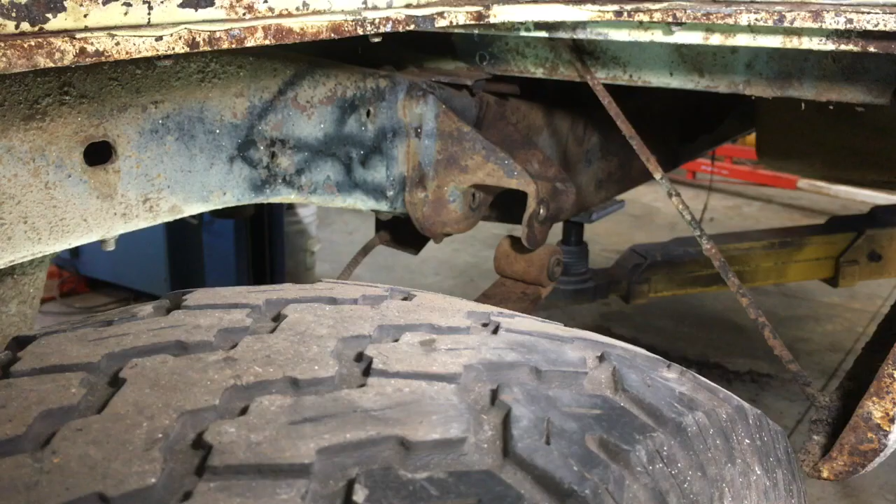So yet another difference from C10s to K10s is the forward leaf spring hanger is much bigger on a K10. See how much further it hangs down? So you have to swap out this little guy right here with this forward one, and it'll effectively lift the back of the truck. I'm thinking something like 2.5 inches, because that's how much taller approximately the K10s are compared to C10s.

So anyway, the other difference is on 67s and 8s, I believe these springs are narrower. So I might need to put some bushings in there, some washers, because this is also bent. Interesting. I might need to put a couple washers in there, which is also fine because I'm probably going to change these springs over to 71 or 69, an earlier or later style of springs. The back hangers are the same, so it makes sense for me to do this now and then come back later and change those springs.

So now I'm getting ready to drill out these rivets and pop this thing off. The other unfortunate thing is C10 frames have this bump right here on each side of the spring hanger. I think it's basically a flute to add rigidity to the frame right there. Since this is a little bit taller and a little bit wider, I'm afraid that it might line up in those. So I don't know what I'm going to do with that. I might have to, I hate to say it, make them disappear, or I don't know. I'm gonna get this off and we'll cross that bridge when we come to it. I'm really not looking forward to the answer on that because I have a really bad feeling it's gonna be in the way.

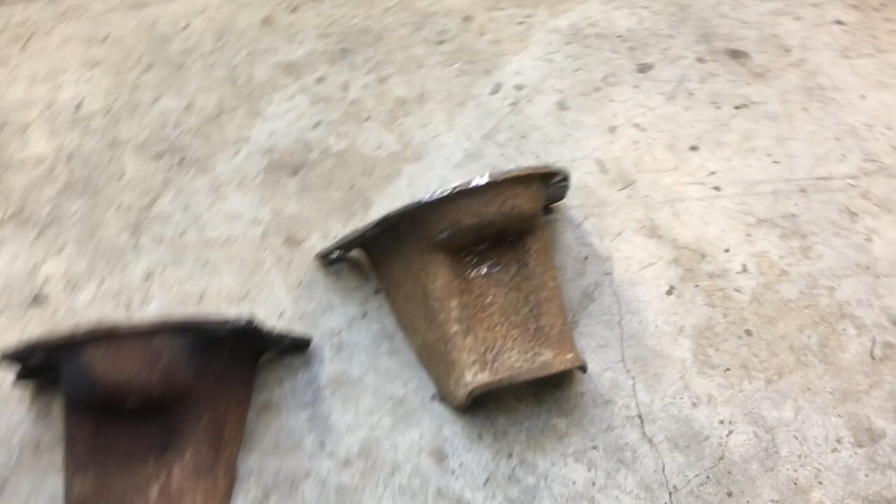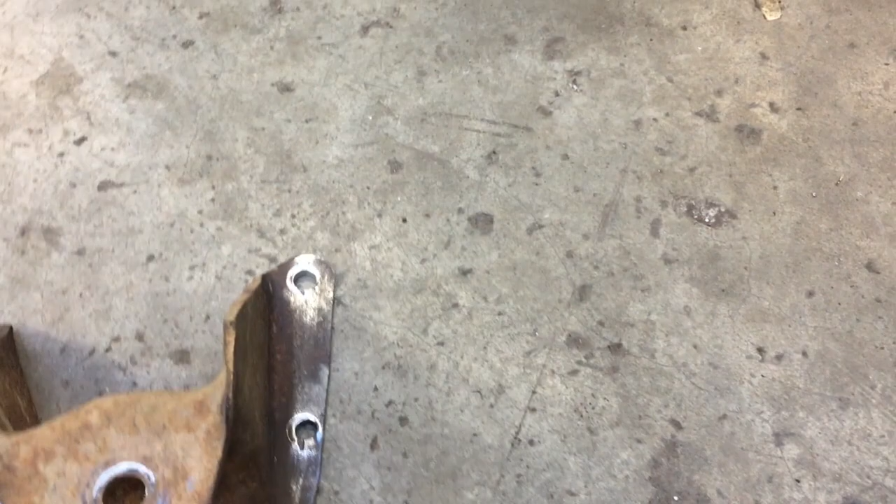All right, serious leaf spring hanger problems. So unfortunately, I just figured something out after I cut the leaf spring hangers off. This is your normal 4-wheel drive spring eye hanger, and it is just straight, it doesn't have any cant to it at all. And then if you put the other 2-wheel drive spring hanger next to it, the whole thing is tweaked. I know why now, of course I figured it out.

This is to make up for the fact that on 2-wheel drive frames, they start to dip out right here, they come out at an angle, and then they have this bow in the frame, which is where the coil springs would go. So I'm in quite a predicament right now. I've already drilled the holes, already had everything bolted in, everything was pretty kosher. So yeah, I'm screwed. I need to figure this out.

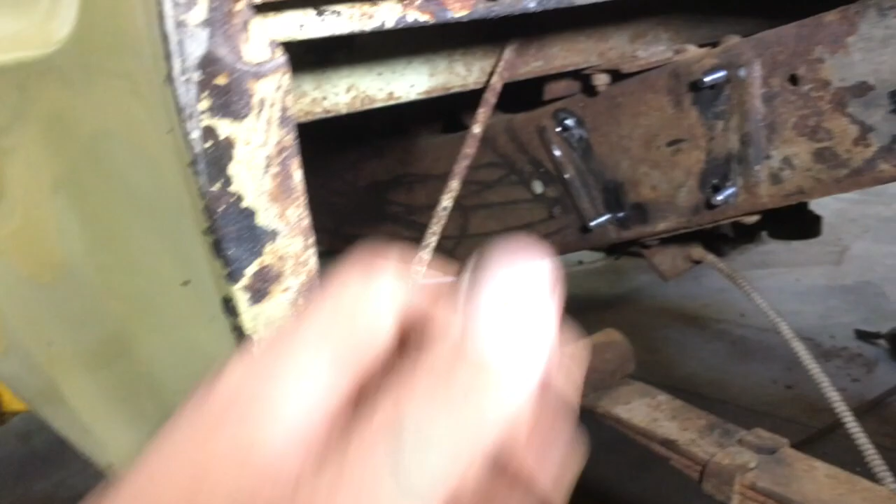I don't know at what point the frame starts to actually bend, but I might be able to go from a 52-inch spring down to the other common length, I think 56. That might get me past the bend, but then I'll have this weird recess that everybody will see. It's kind of dumb, I don't really want that, and I really don't want to change these springs because I'm lazy.

I do have a set of the longer springs, but they're lift springs, and I'm trying to just do this on the real cheap. So my other thought is to just shim the front of that out with a plate, just like a quarter inch plate, and see if that does it. The problem is it's about a half inch canted, so when I measured this all out, I don't think a quarter inch is enough. I have one sitting right here that's a quarter inch off. It might work. I think I might put it together and see what that looks like.

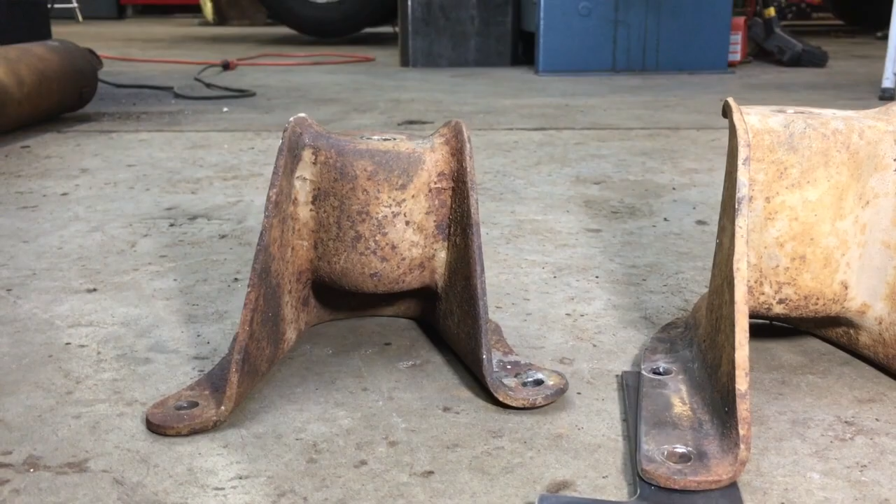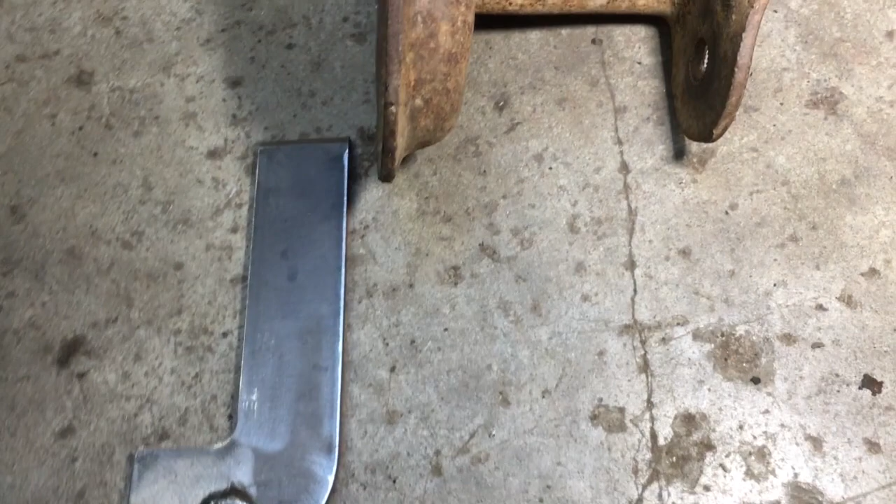So what I'll probably do is just make a spacer right here and see if everything lines up. Also, the difference is the width of the spring hanger. The old ones are about 3/4 of an inch narrower, which is not a big deal.

I'm just going to cut some washers on the CNC so I can space the springs in here. The reason this is a good thing is it will give me a little bit of wiggle room one way or the other, so I can make sure my axle is in straight and all that. Once again, I'm trying to make this thing look like an original truck.

So for any of you watching who are like, why is he going to detail when he could just fab up some new billet spring hangers or whatever - that's why.

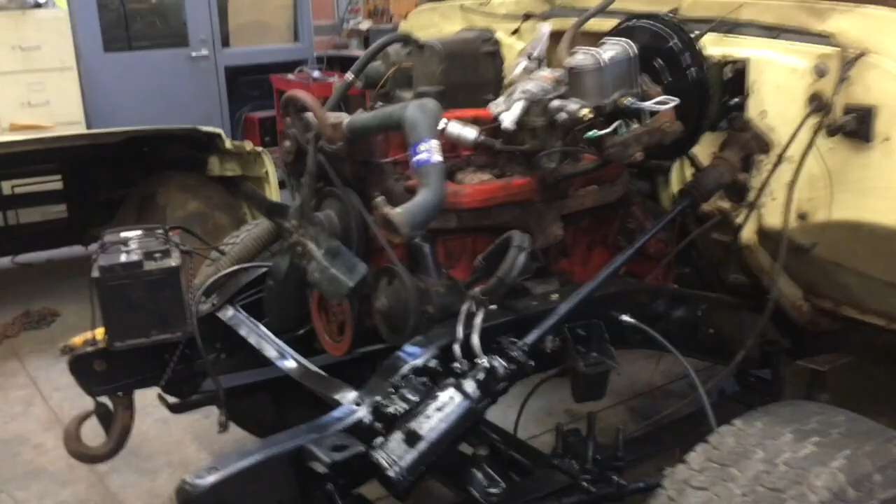Anyway, that's today's update. I've been having a bit of a hard time. I also went ahead and decided to get a new master cylinder and put the proper proportioning valve on, and Inline Tube is sending me another kit to fix what I botched before. So that's kind of the theme of this build: go too fast, screw up, and then backpedal until you get it right.

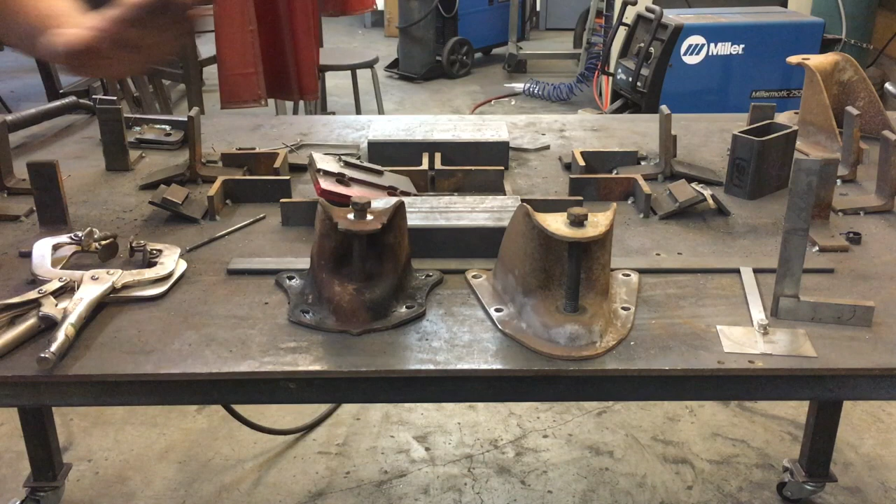I'm about to either ruin all this stuff or make it nice. So there's the difference, if you can see it. This is canted 10 degrees, and then it's also going that way a little bit.

Oh man, people are gonna say I'm gonna die. I'm gonna cut this right here, then bend it to match that angle, and hopefully do a really nice job re-welding it. That's the best plan I have right now. My fallback plan is to just put these back on it and get some lift springs. So we'll see what happens.

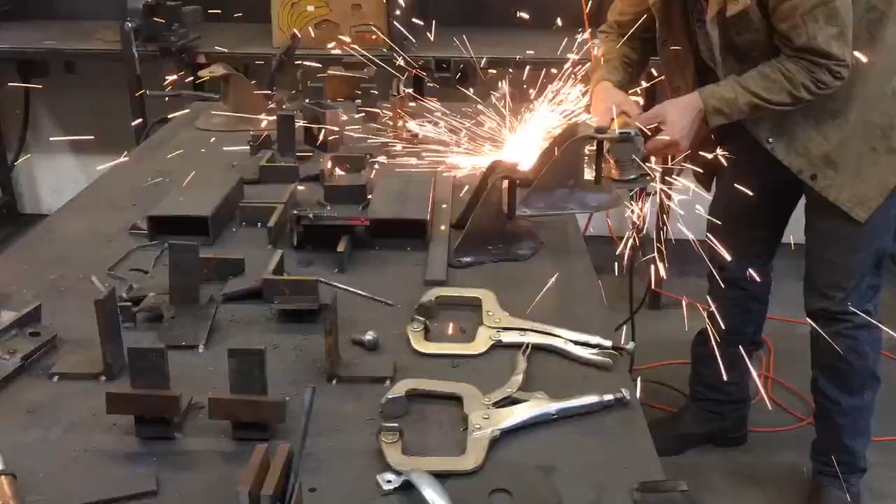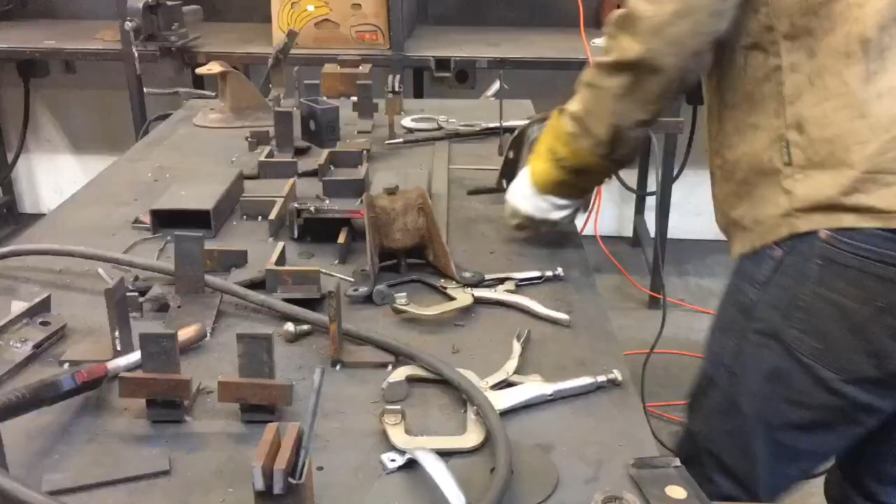Okay, so I went ahead and sliced this and spread it, and now I'm gonna try to fit it on the truck to see if I got the right angle. I matched it to the other one, so I'm relatively sure I got it, but I'll have to do a perfect weld on this.

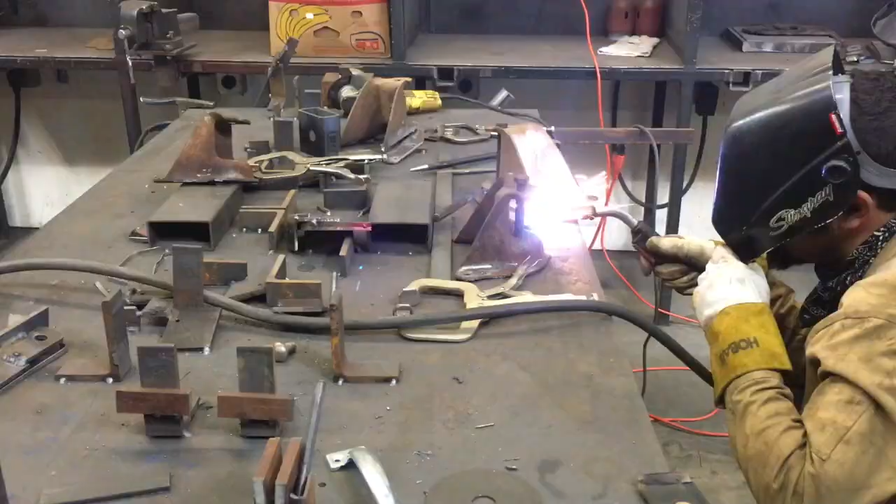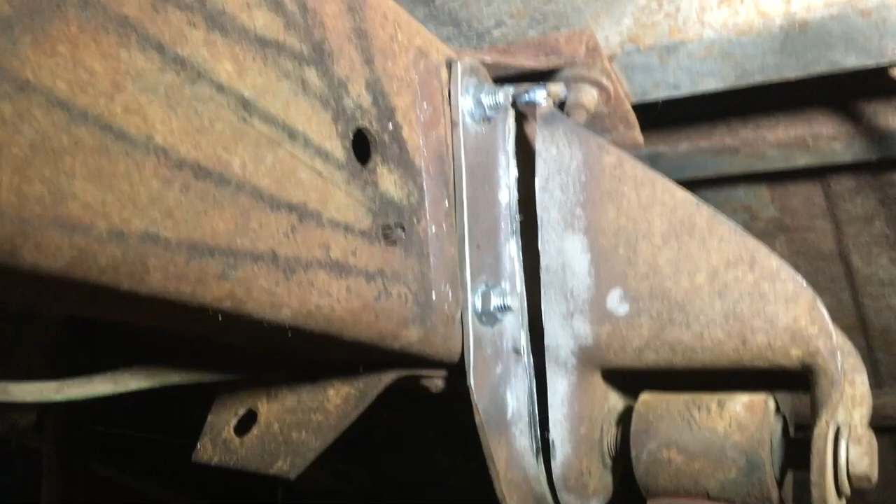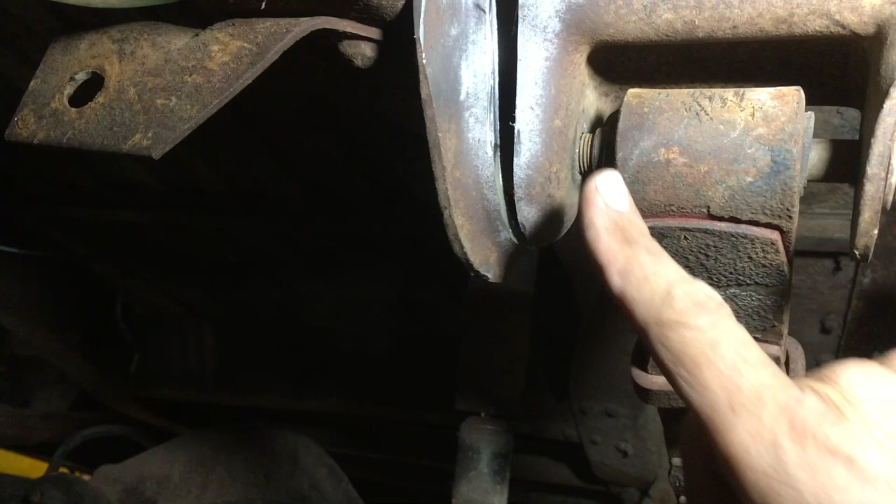All right, so I made my modification - you can see I just split the side of this bracket and pried it out. It ended up being just right, I think. The bolt went right through. I have the same spacing on each side, so this is going to take a 1/4 inch washer, and this is going to take two 1/4 inch washers on this side. It's the same on the other side, so I think I got this just right. I kind of got lucky.

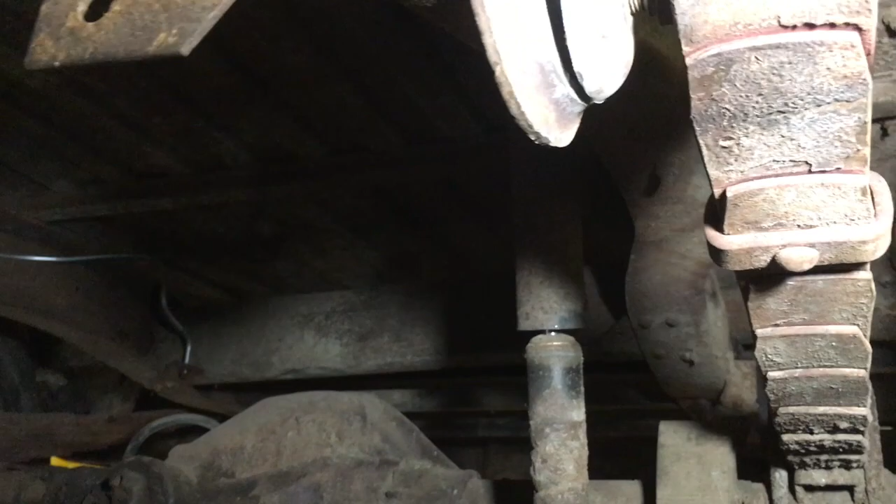So it's all bolted in right now. I'm gonna plasma cut up the washers on the CNC, dry fit it one more time, and then pull everything out, full weld it, grind it, and put it back.

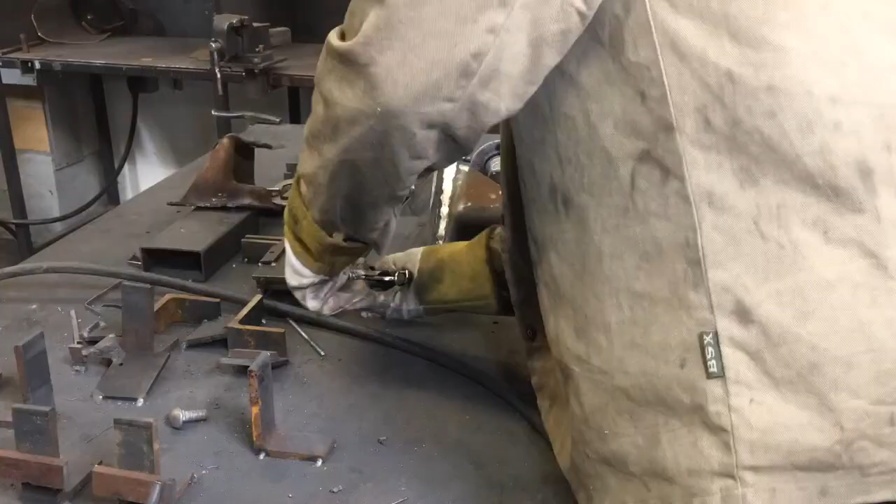So I have the rear leaf spring hangers on permanently, and this is what it looks like for ride height. I'm not sure, I think this is okay. It still looks like it's a little higher in the front, but I still gotta put the front clip and the rest of the truck together. It might help a little.

I just got up here and jumped on this thing, and I was able to jump hard enough to make it bottom out. So there's no shocks on it.

It's definitely still leaning back a little bit, but there's no front clip. Definitely taller though, about 2 inches taller.

Something's up right here.

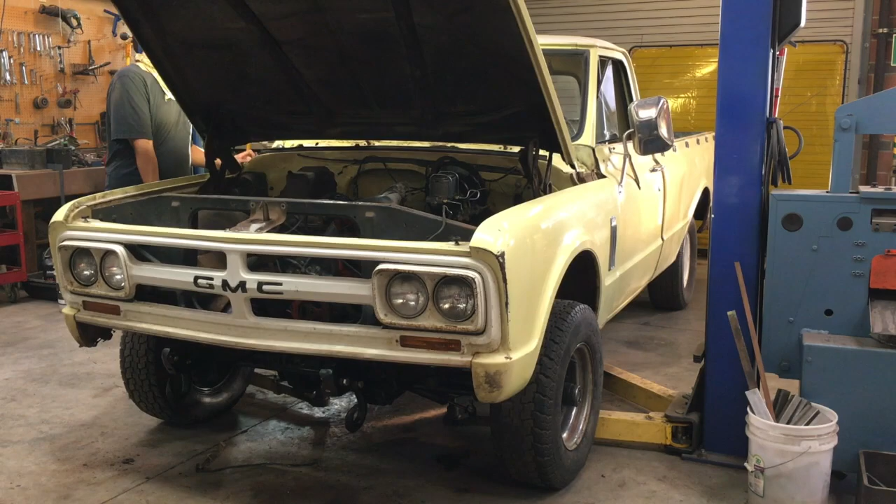It'll be about like, just hold it, just for, right? That's good.

And then West Coast mirrors. On the side ones? I need some West Coast, dude.

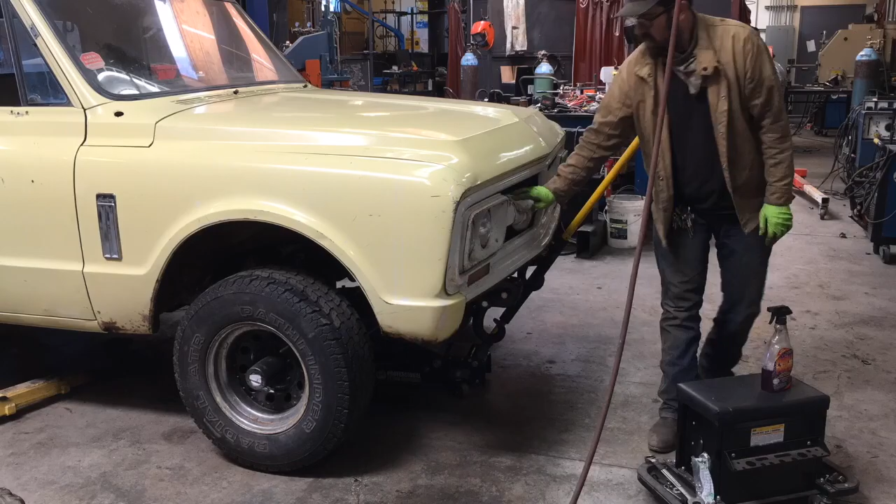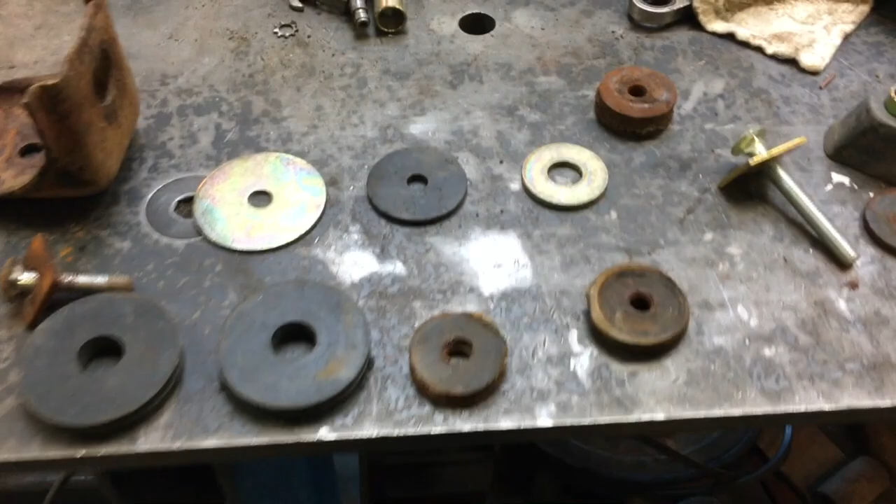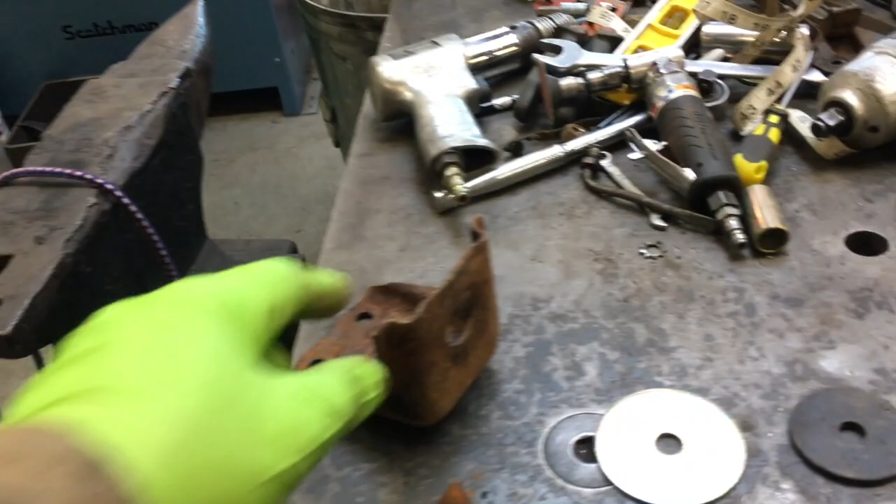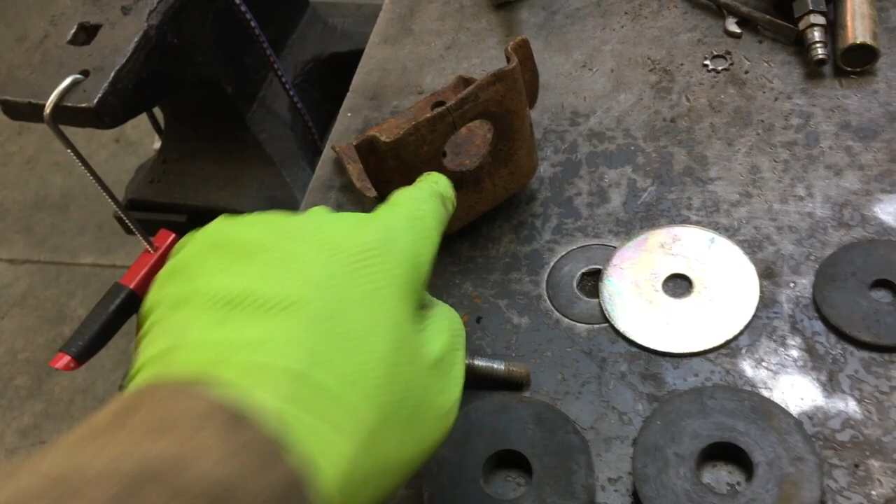So I wanted to go over another difference that 67-68s have, which is the forward body mount or core support mount has a different size hole. They use the smaller style bushings. I'm wanting to use the ones that I have because I have them. In order to do that, I had to grind off this little collar since that was too small for that hole.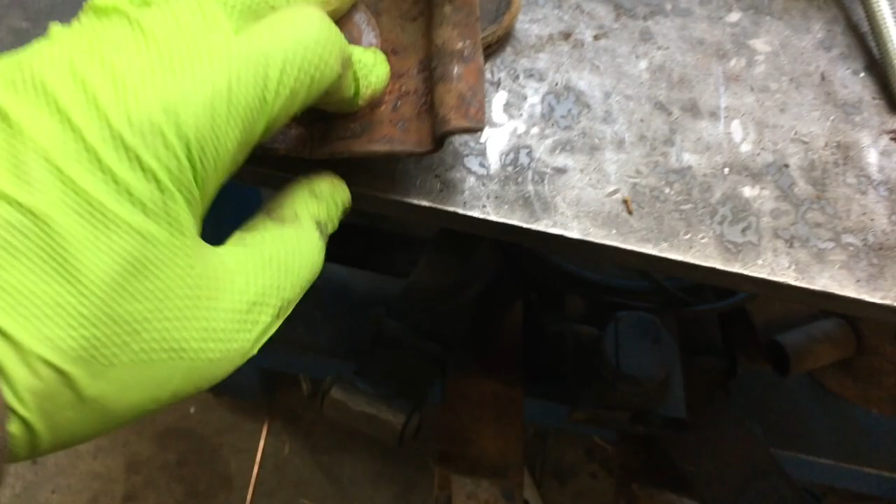Other than that, it should just fit right on there, no problem. And I can use this newer style, far superior bushing. I already checked that it gives me the right body lines and all that. So that's just another funny little difference, this is the whole setup right here. This is what it looks like on the truck. This goes in between the mount here like that, and then this guy goes on the other side, so this is how sandwiched it is. And of course these are all rotten and no good, and there's no give in these at all. So with this, these are polyurethane, should be a little bit better.

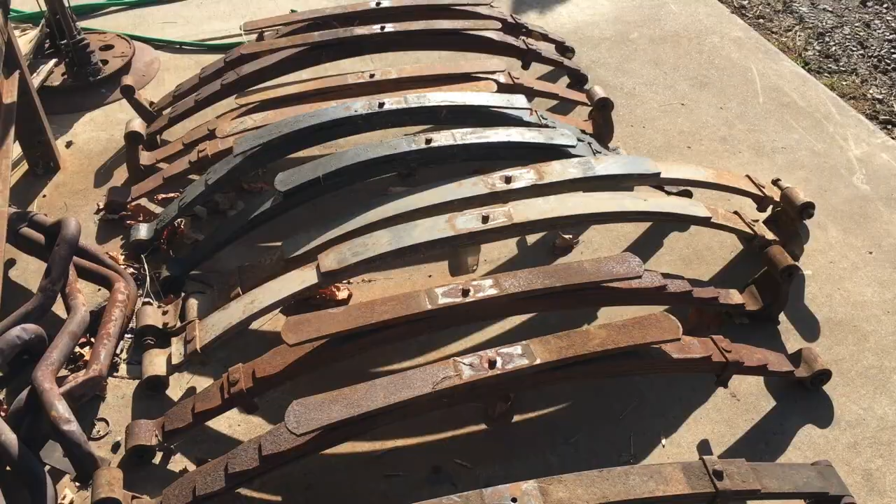Anyway, we'll see. So every one of these springs is out of a 67 through 72 Chevy pickup, and every one of them is different. So something that might be a confusion is people think, oh, I have the 67 pickup, it's going to take the same springs as a 72 or 70 or whatever, and I can tell you there's a lot of differences.

So right here, this is a front springs. These are aftermarket, probably something like a 2 or 3 inch lift spring. And they're actually quality. I'll keep these around and use them for a build someday.

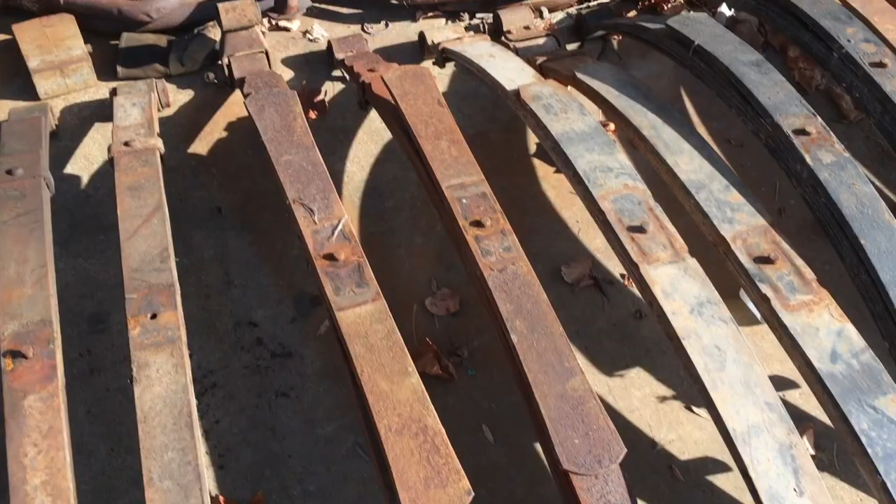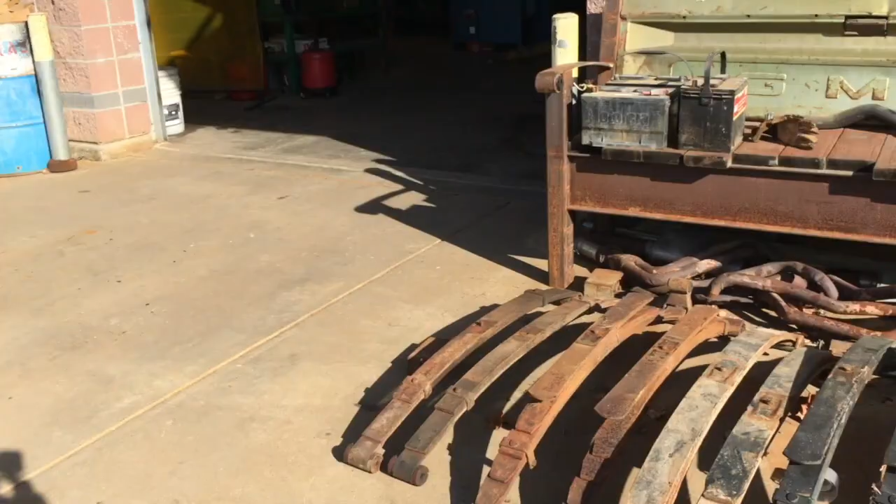This next spring over here, these are rear springs, and these are out of like a 72. This next set here, these are aftermarket springs as well, but they were out of the 68 frame that I have over there. There was an original 4-wheel drive frame that I used the parts off of to convert this truck to 4-wheel drive. The funny thing about these is, so far all the springs I've run into in the back of 67 through 72 Chevy pickup trucks are 52 inch springs, and these are the 56 inch springs that are less common, I guess.

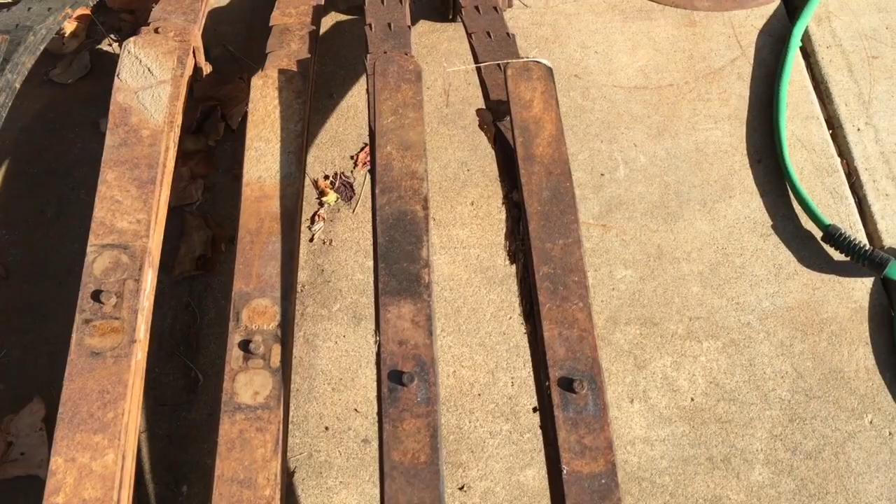These are just some aftermarket junk, but anyway, I think that's what they came with, was 56s on those, and I'll show you. Then we have another set of 69, 72 style rear leaf springs, and then we have a set of 67 two-wheel drive rear leaf springs. The reason I know they're 67s is because they're slightly narrower. So it's a little bit of spring information. Oh, and then these right here are out of a 71, and they've been re-arched. So those are about a 4-inch lift spring as well. Anyway, there's just a few differences between lift springs or leaf springs that you think are all the same.

Okay, so I'm going to make a final installment video on this little 67 that I converted to 4-wheel drive. And I've been driving it periodically now for about a week.

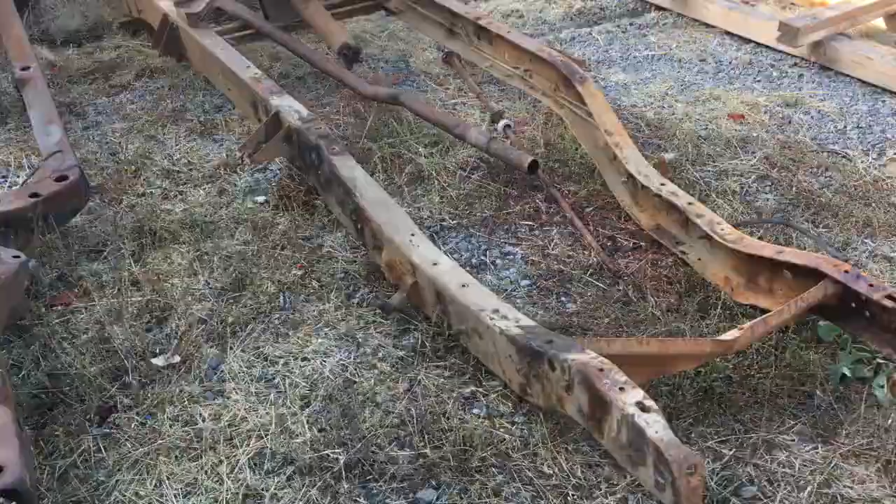So other than this being upside down, this is a factory 68 Chevy K10 pickup frame. And we can go over some of the differences. Now, I've cut off all of the bracketry, which I bolted on that truck. Meaning the spring hangers and everything I needed to convert that to 4-wheel drive.

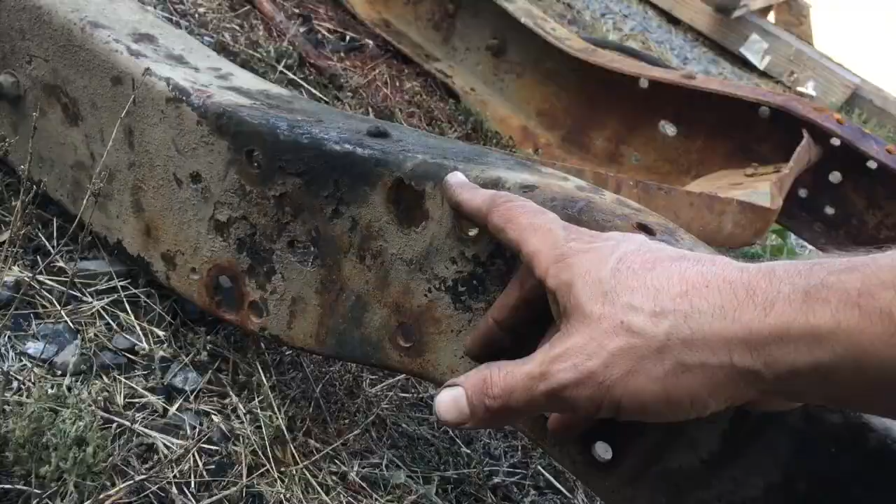The forward leaf spring hangers are way different. So the first thing I want to talk about on this truck is it being a 68. This is, like, once again, it's upside down, but this is the driver's side. It's completely flat right here in the front frame horn. Normally what you'd see around here is a dimple out and then another dimple in, so that you can put a power steering pump on it, or a power steering box, that is. And this doesn't have that. So 67s and 68s, this is a difference on their frames. They are completely flat here.

Now, here's the weird part. This is my original 67 GMC, originally a V6, C10 two-wheel drive. It is not supposed to have a dimpled frame, but it had one.

And it also had power steering, but it had that hydro-assist stuff, so that was weird. It just sort of bolted right on. If you watch the video, you know it had the dimples out but not the dimples in, so I just heated the frame up and tightened the bolts down, and it kind of aligned itself.

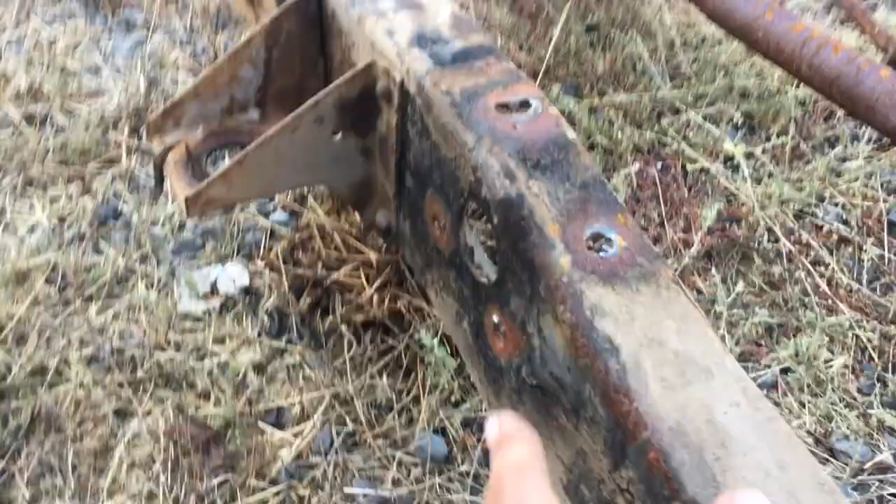So there's the first thing, starting from the frame going back. That's a difference between two-wheel drives and four-wheel drives. The other difference is right here on four-wheel drives versus two-wheel drives.

If you've watched the video, you know there is this big dimple. You see this? This is another frame I have that I had to fill all in and straighten.

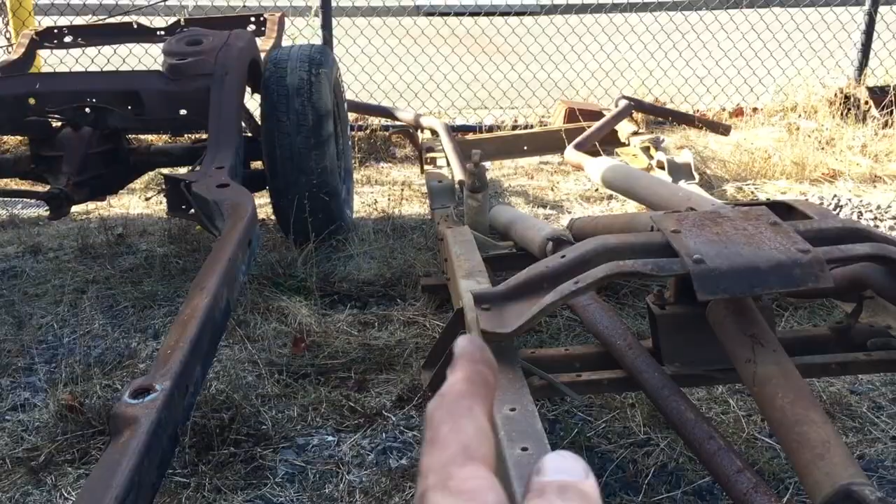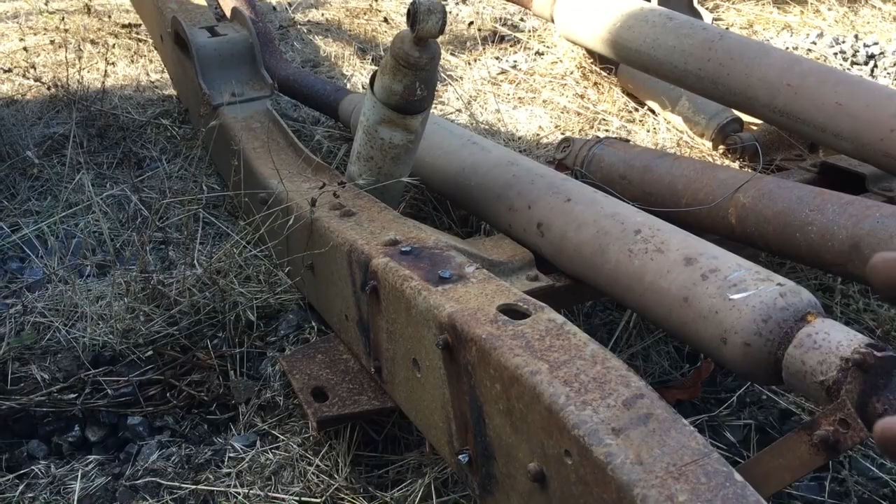Okay, so here's the big difference. From there back on a normal four-wheel drive, the frame is completely straight. On a two-wheel drive, it actually kicks out right here, starting around the forward bed mount, and kicks out like that. What that does is allow it to be wide enough in the back for the coil spring pockets to line up and get welded in or riveted into place.

Another thing I find fascinating about this truck, and I don't know if all '67s and '68s are like this, but this one had 56-inch springs on it. And I cut these spring hangers off—they had not been moved.

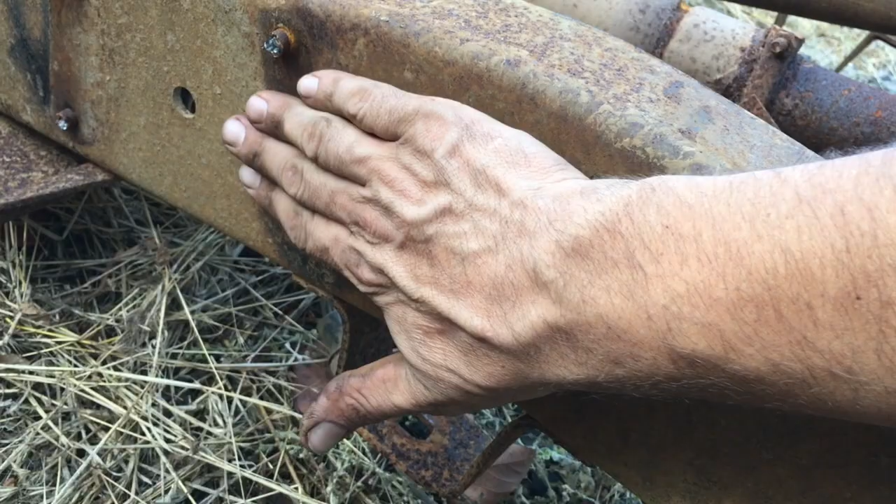The other thing with four-wheel drives is there's no dimple. Next to the spring hangers on two-wheel drives, there's usually this little outward dimple that I think is there to add rigidness to the frame. So if you're going to look at a two-wheel drive or a four-wheel drive and tell if it's an original four-wheel drive, you might look right there because you can't really hide that. I guess you could grind them out.

I thought about doing it, but I just decided to leave them because I'm not going to lie about this truck. I'm just going to tell everybody, hey, it used to be a two-wheel drive and I converted it to four-wheel drive. No harm in that.

Two-wheel drives have this big cross member in the middle that we went over in other videos, and four-wheel drives don't.

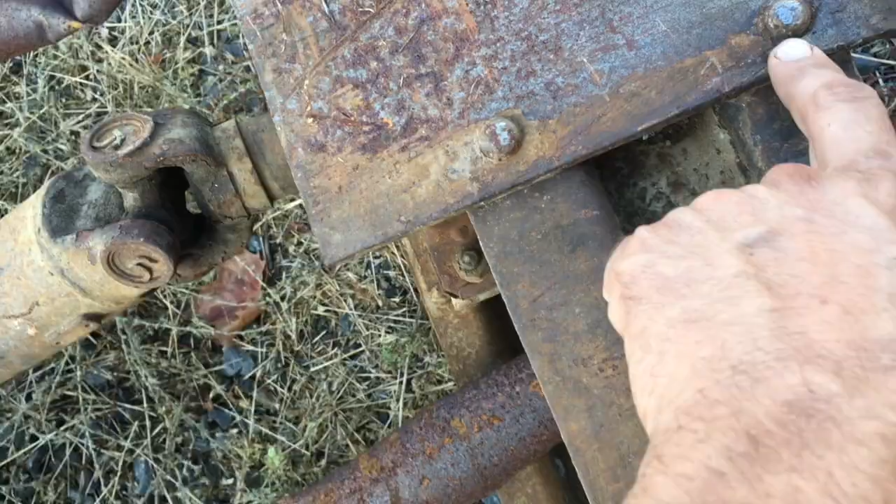This looks like... I don't know, that actually looks like a factory rivet. I was going to say that looks like an aftermarket kind of setup there, but I guess it's not.

I didn't know they made four-wheel drives with two-piece driveshafts, so anyway, this one had one. I'll probably keep all that stuff in case I ever want to use it. This frame is not garbage—I'm going to keep it. I'm probably going to cut it down to just frame sides so I can store it easier.

So I still need to paint match this tailgate, but like I said earlier, I've been driving this truck for about a week and it's been a good little truck. Been running great. So this is its final look—just a little stock-looking K10 is all I wanted.

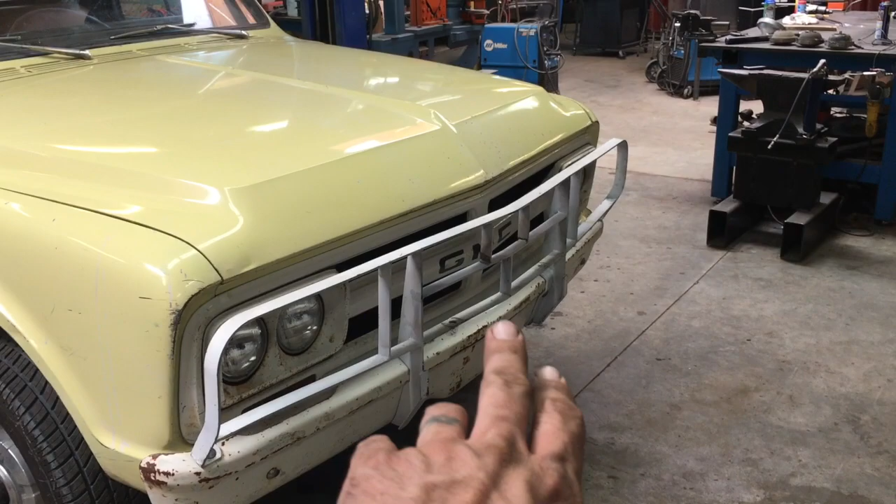I just like the fact that it's the one-year-only GMC grille, and you don't really see those in white that often. One-year-only badges, just a strange little truck with a small back window. Originally a V6, strange color combination with the yellow on white.

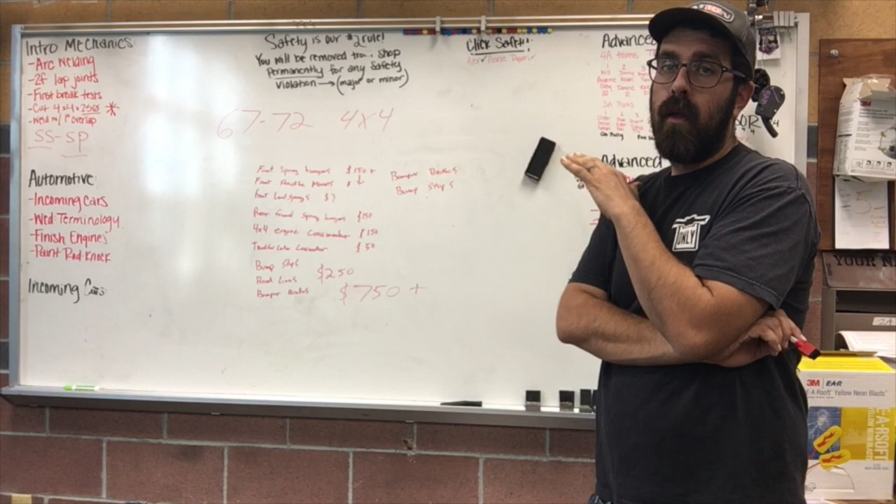So I wanted to do a wrap-up video on the cost of converting a two-wheel drive C10 into a four-wheel drive, and go over a couple of the key details I maybe missed throughout the video. The number one takeaway from this is, unless the truck has sentimental value to you, or you have no access to a four-wheel drive frame, I wouldn't do this.

From a monetary standpoint, I think it's beneficial for you to buy a frame or buy a whole other truck and donate your body to that truck to make it a four-wheel drive. If you have nothing going on and you're bored, or you're a teacher during COVID and you need something to keep you busy for a long time, maybe. But just the price of everything, if you were going to convert it, it doesn't make sense.

It really doesn't. So right here we have front spring hangers, 150 bucks. Sometimes a guy will throw in the front shackle mounts with that.

Front leaf springs, I didn't even write that down in my total, but those could be a couple hundred dollars, or if you find a used set, 100 bucks.

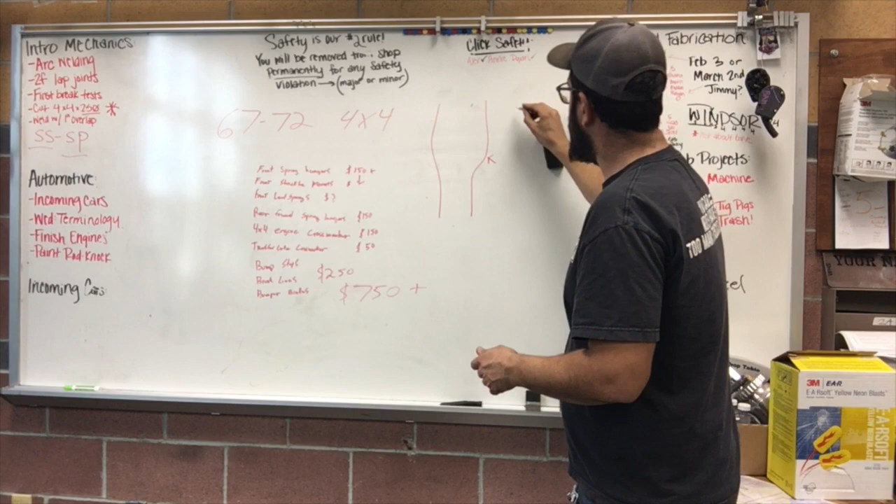You have rear forward spring hangers. This is the thing I had to slice and twist because the frame on a two-wheel drive looks different versus a four-wheel drive, and the spring hanger goes right here. On a four-wheel drive frame, it's just straight. So when you get these rear forward spring hangers from a four-wheel drive truck, they're going to be in the wrong position for your leaf spring, because your rear mount ends up back here.

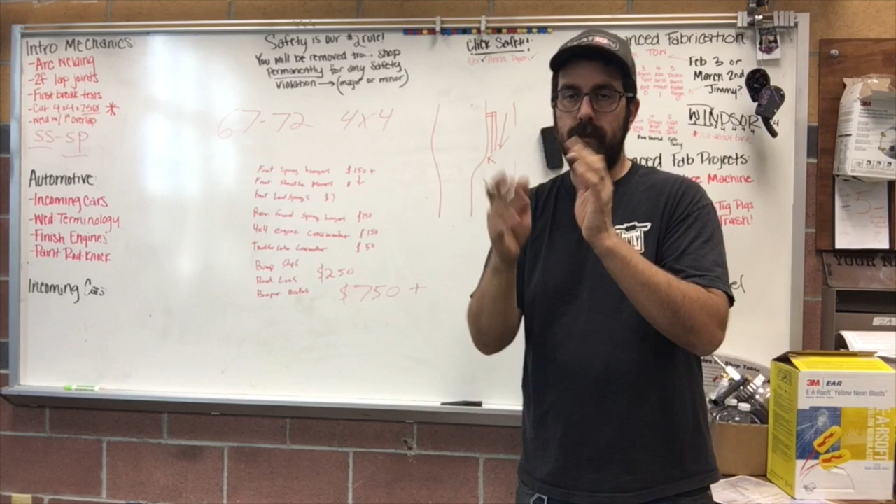What I ended up with was a leaf spring that was angled, and it didn't work. So I had to modify the crap out of those things, as you saw in the video. So you don't have to do that - you could just get lift springs for a C20 in the back, or put a block if you don't really care. Now, I would never change a rear spring hanger again.

A lot of why this was time consuming for me is because I'm trying to make it look original. I was trying to make it so that if you pop your head underneath my truck, you'd think this is an original K10. I think I'm gonna fool 9 out of 10 people. I'm not really trying to, but that's what I was going for, I guess.

So anyway, front leaf springs, the rear spring hangers, I've seen those go for $150. I was gonna buy a set of front spring hangers and shackle mounts before I got my twisted donor frame that I ended up not using. Those are in the $150 to $200 range, and I'm kind of keeping things on the low side on this.

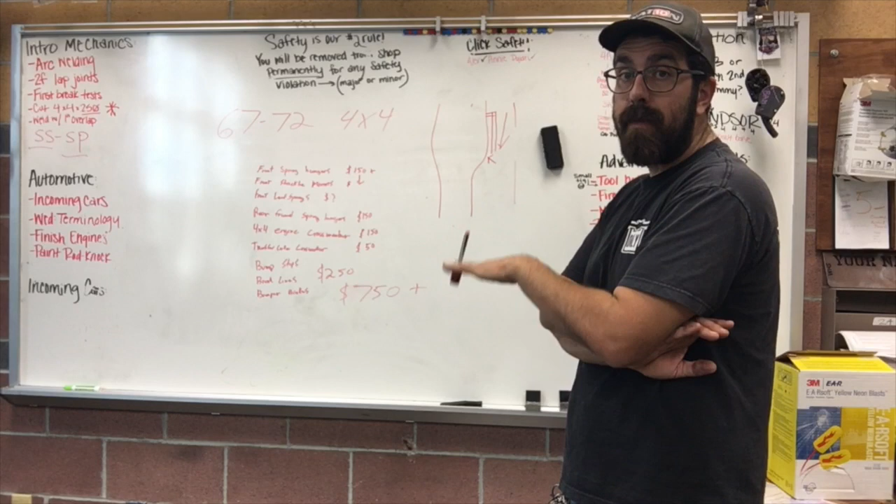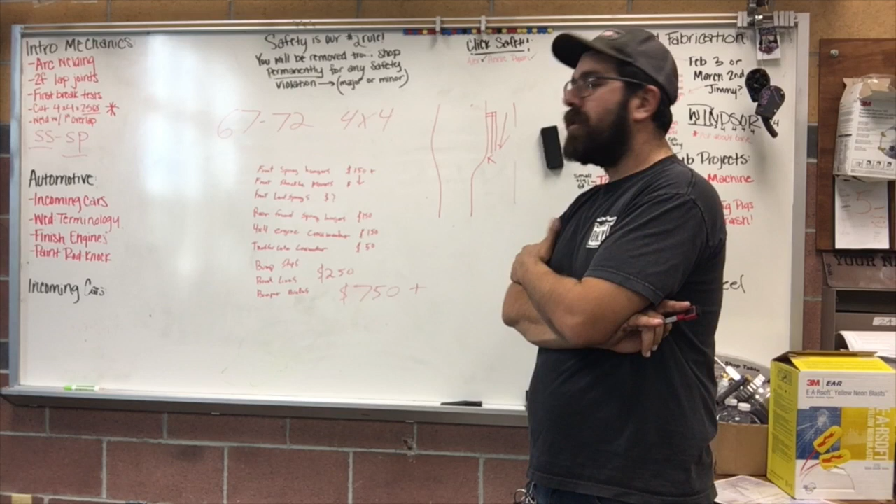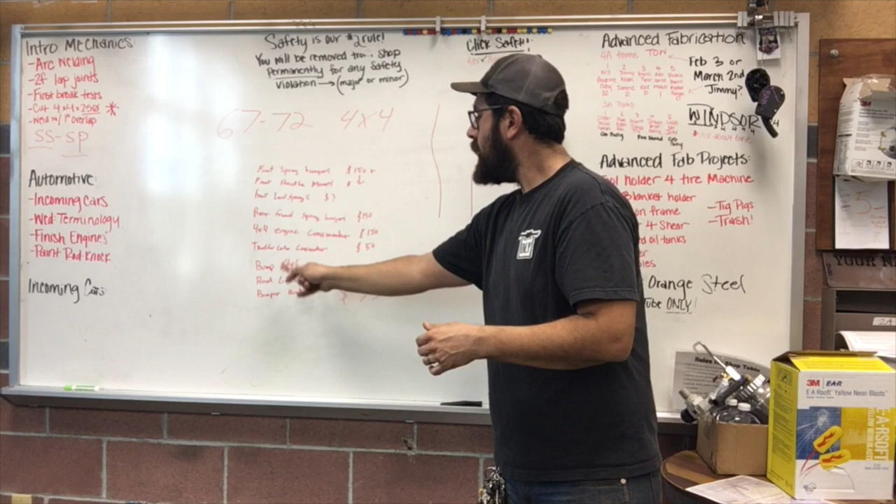A four-wheel drive engine cross member for a 67-72, I paid $150 for mine, that's actually what it costs. I had almost all this stuff. The only thing I had to buy was a transfer case cross member for $50. I've seen them sell for 80 or 100 on the forum. Bump stops, brake lines, bumper brackets - it all adds up to $750.

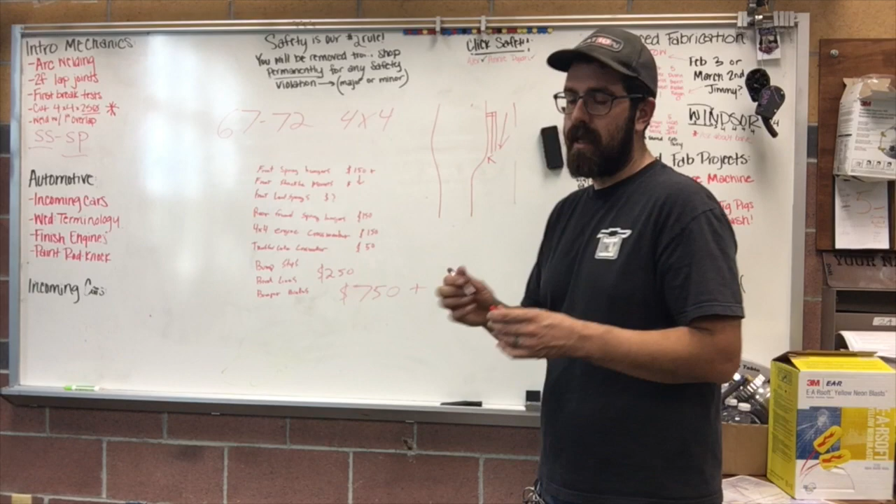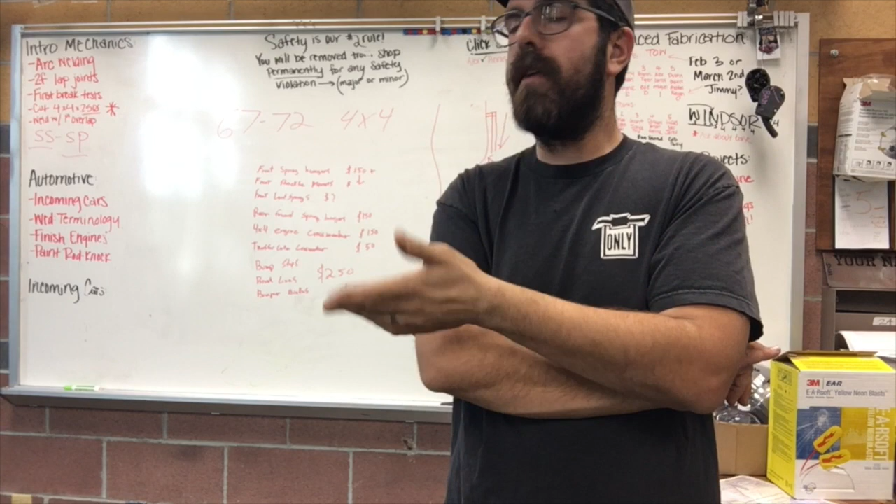And there's a lot of stuff I left out here, so you're gonna be at least $1,000, maybe $1,500 in, unless you have a lot of parts. Now, that was my thing - I had all these parts laying around, so I just did it. And the truck was all together, it was running, it was driving, it was kind of a nice little original truck. So that's why I did it.

But I will say, for most people, it is definitely not going to be worth it. It's easier to find a frame. There's just too many differences.

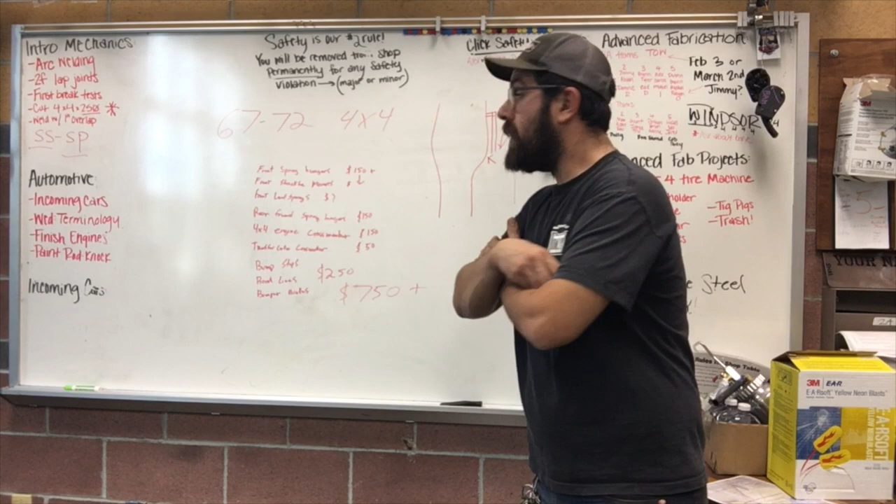Now, you watched the video, you saw the amount of fabrication I had to do for the shackle mounts, that spot there, to flatten that spot out. I had to heat and bend that. I had to trim those rear spring mounts. There's just a lot. I ended up making my own front spring mounts because it was 67, 68 style. So just a lot of work.

The truck's great. I've been driving it for a whole week right now, every day - taking my kids locally to their daycare and stuff in it. And it's been fine at freeway speeds of 70 miles an hour. Doesn't even feel like it needs alignment, so I'm very confident that all my stuff is straight and there's no problems. It doesn't pull one way or the other - it's very straight, better than most old trucks. So I'm glad that it worked out, but I just wouldn't recommend it.

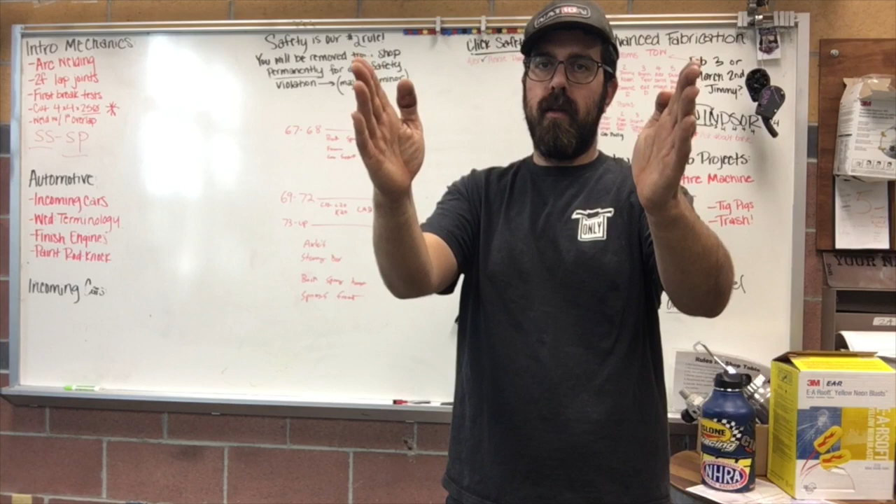So here's a couple things that vary from year to year and from C10 to K10. The number one thing is the frame. Four-wheel drive frames are straight, and two-wheel drive frames have a bit of a bow to them in the back, so they look like this.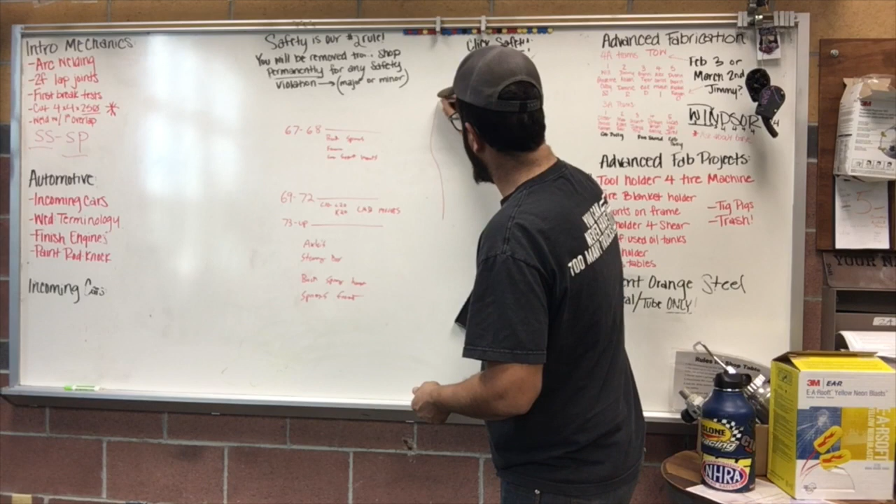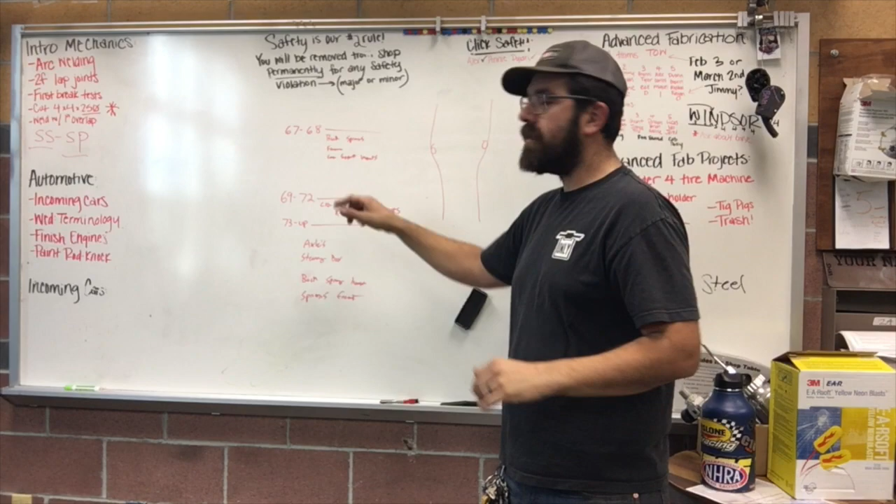This is so that the spring pockets on a coil spring truck line up with the frame. So the frame is different. One thing I didn't expect is C10s have different cab mounts than K20s and C20s. C10s have their own basic cab mount, and then 67, 68s are even different yet in the forward radiator support mount up there. That's a whole different thing.

You can kind of convert mounts and stuff, which I think I put in the video, but it's just one of those things you'll run into and you'll be like, wow, this is dumb. So it would be easier to convert a C20 to a K20 or K10 even, because you won't have to change the height of the cab mount brackets, if that makes sense.

So what is the same on trucks? Well, not a lot. 67s have their own, more narrow rear leaf spring, which will help you if you're gonna change it, because you have a little bit more room to play with to get everything straight. The 67, 68 frames are different. They don't have the dimple out for the power steering bracket. The core support mounts for 67, 68s are smaller. I think I already went over that.

What can you use from a 73 and up? You can use any Dana 44. Every Dana 44 Chevy-wise is going to be the same spring spacing. The steering box, any Chevy four-wheel drive steering box, I think basically like 90s and in 89 or 91, or whenever they stopped making the square body, I think those are all the same.

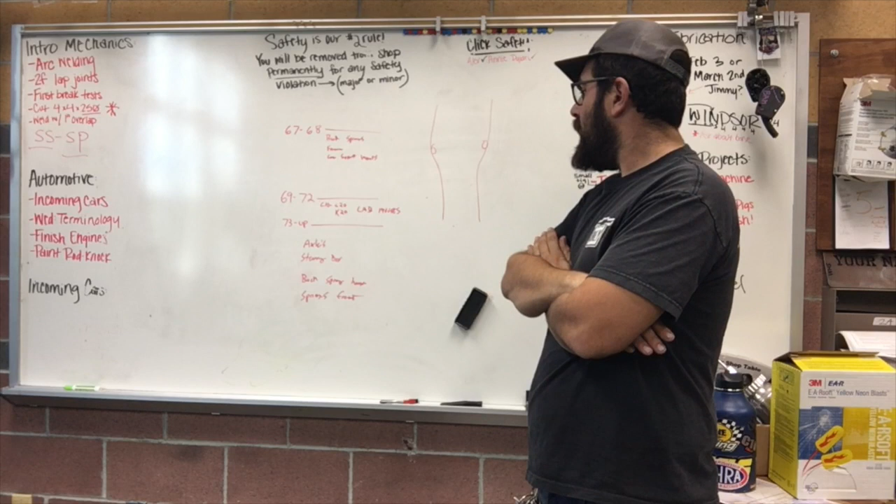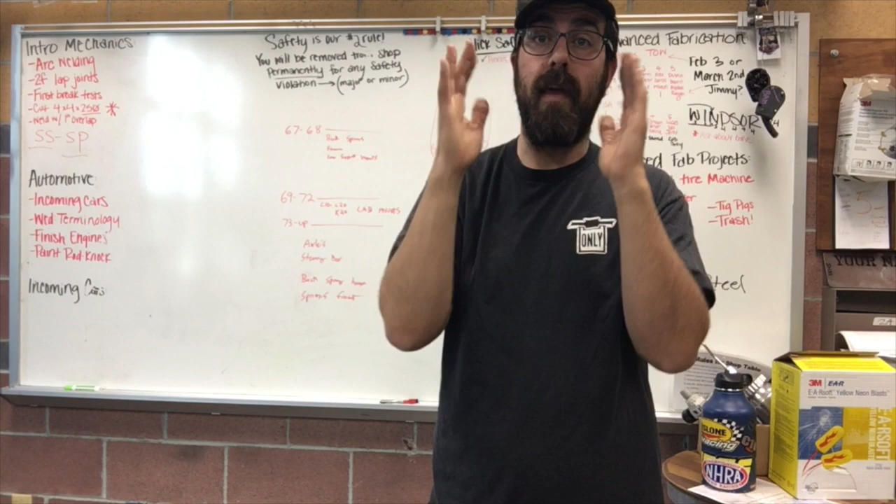And then the forward springs, you can use those from a square body. They go right into a 67-72. There's some debate on this. People say there's a difference, and there's not a difference. I've parted out both trucks within the last month, and they've had the exact same springs. So a 69 through 72 versus a 73 and up.

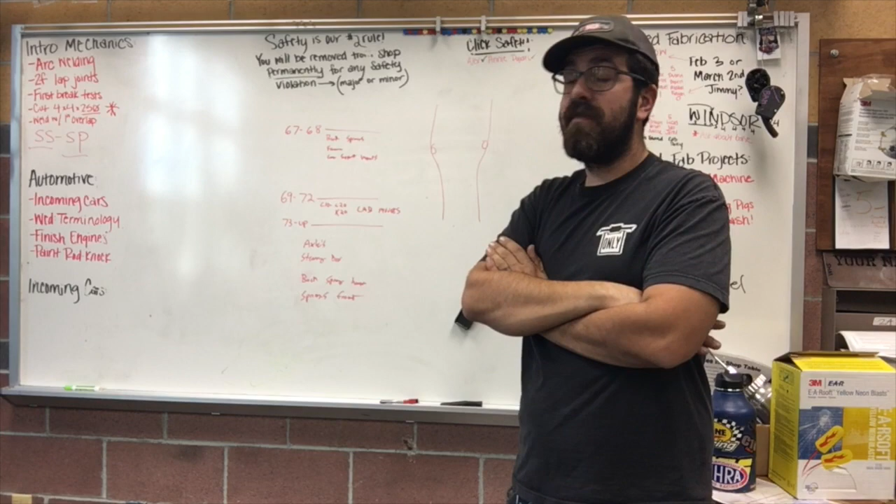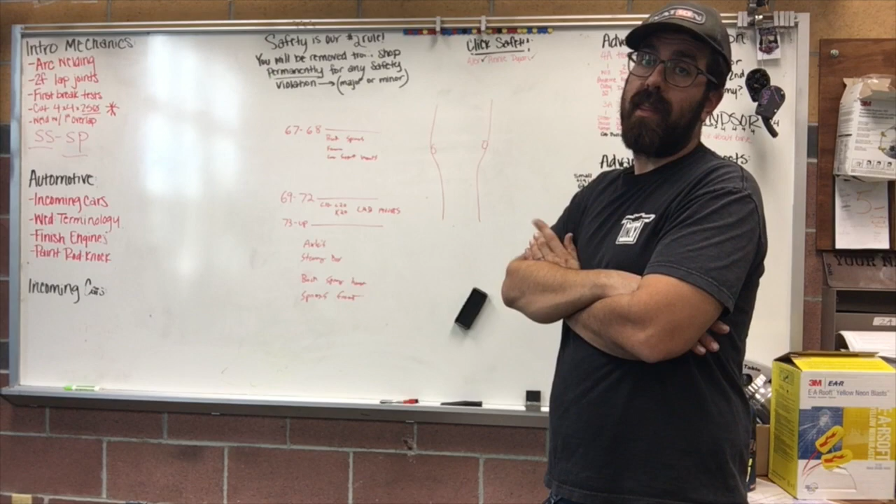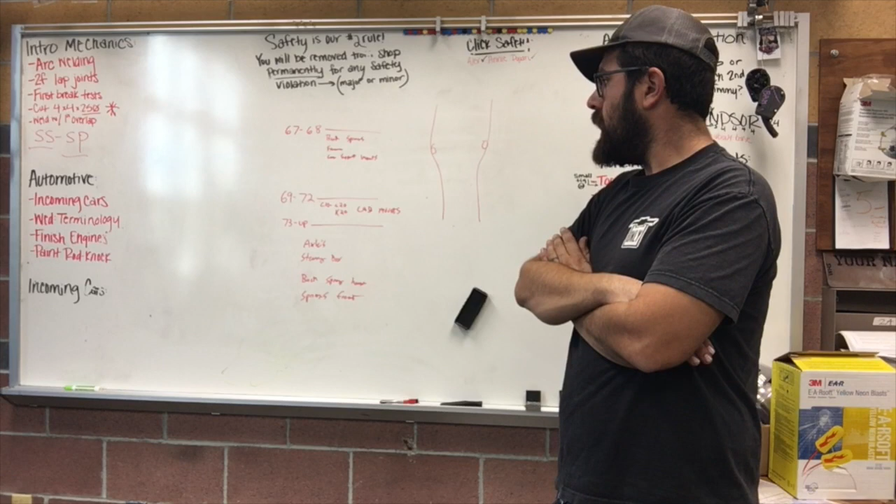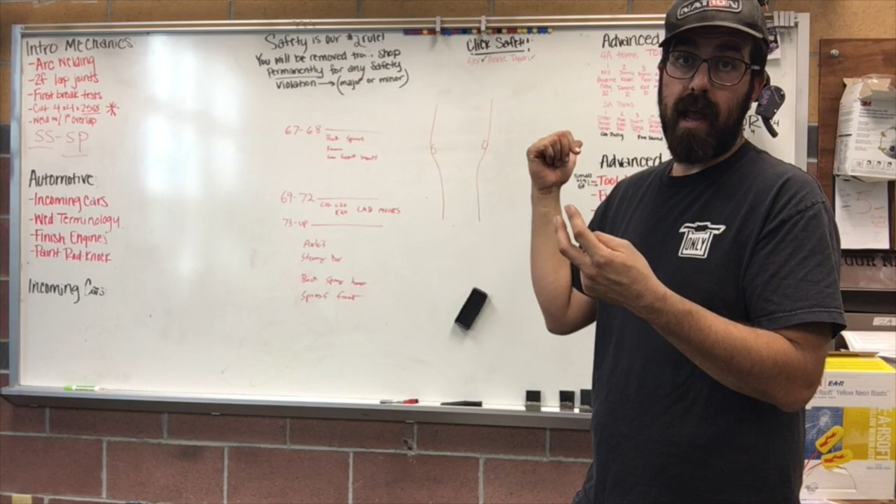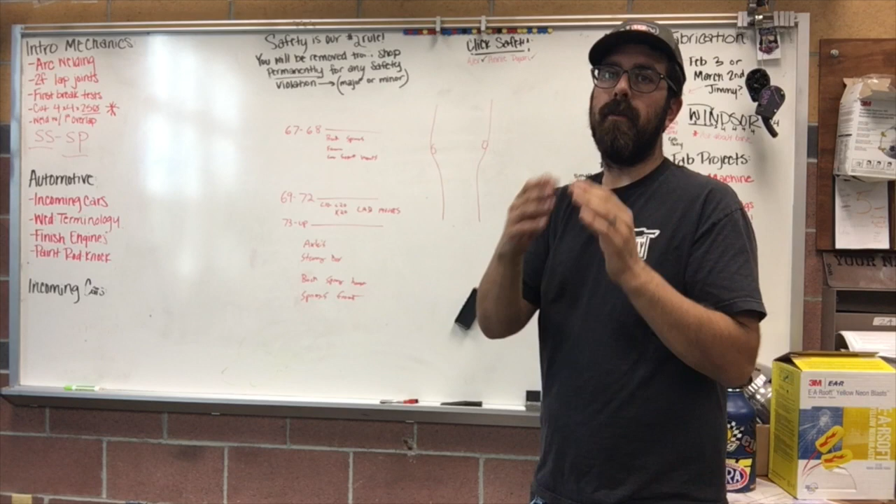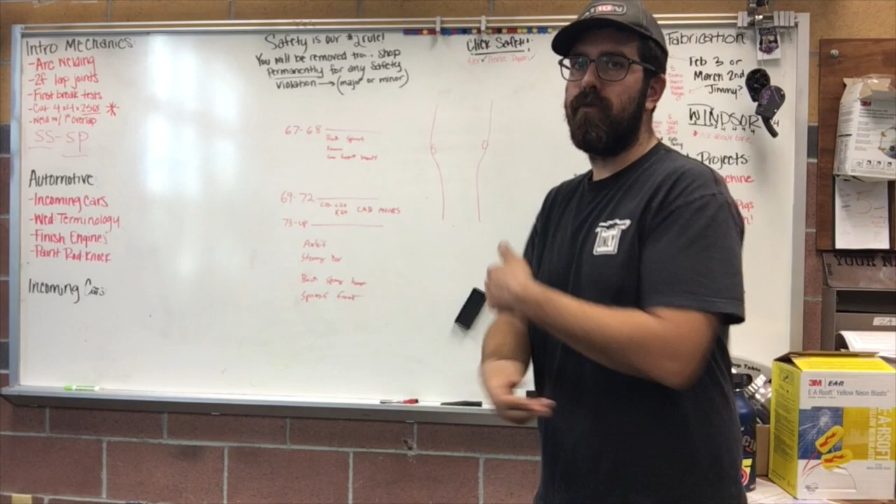So those are the only two years with the narrower springs, if they're two-wheel drive. If they're four-wheel drive, they're not narrower because they have that weird 56-inch spring, which is a better spring. And you guys, all these four-wheel drive guys that know more than me, will be like, oh, 56-inch springs, where it's at. Yeah, whatever, dude. I don't know, I'm just trying to make this thing look factory.

So there's lots of differences that you wouldn't expect. All in all, it's fun, but not worth it. Buy a frame, and whatever you do, don't convert a 73 and up frame to work for your 72 and back truck. There's a lot of little things that are different, and I've had students that have done it, and it's hard to get everything to line up right and not be a complete hack job of butchery. It's not worth it. You're better off, once again, finding a frame or a donor truck.

It can be done. It can be done. I'm not sitting here saying it can't be done. I'm gonna do it, but it's just not worth it unless you have a bunch of time on your hands.